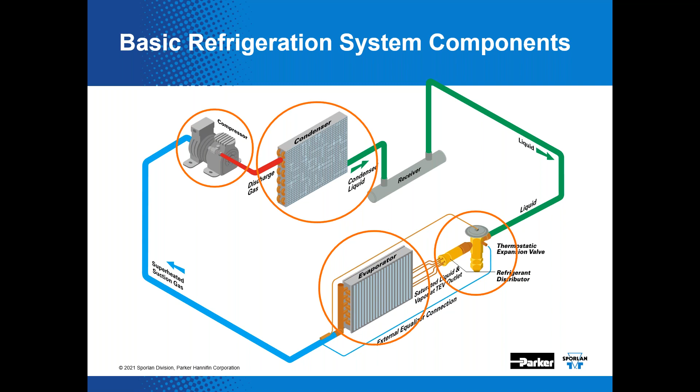That modern refrigeration system can be pretty advanced and seem very complicated. Jason, have you seen this rack before? That looks like the rack that's out in our lab.

Some installations have multiple distributed racks throughout the store if it's a supermarket. Other designs include one or more compressor racks in a mechanical room with split suctions intended to satisfy both low and medium temp refrigerated cases. These systems may include different refrigerants, condenser types, unloaders on compressors, subcoolers, heat reclaim, head pressure control. And here you can see a bank of compressors, control panels, an oil separator, an oil reservoir, oil filter, oil level controls, and even examples of our Y1236 differential valve.

Gotta kind of squint to see those. You kind of do, but they're there.

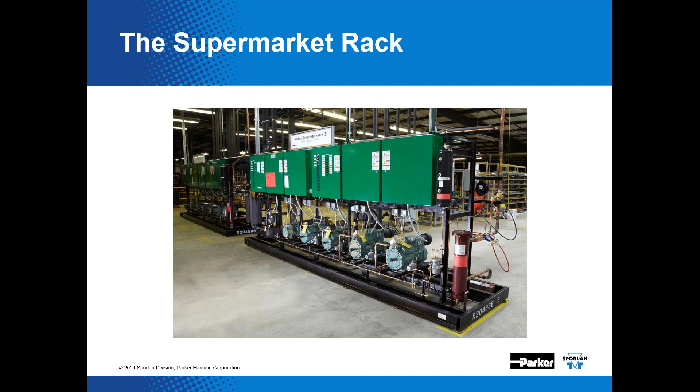They are. And here is that type of system in a schematic form. Again, it can seem quite overwhelming, but if you remember, you've got four main components, no matter how complicated the system. And if you look at it from that standpoint, it's not that complicated. And today we're going to talk about this part of the system on the high side.

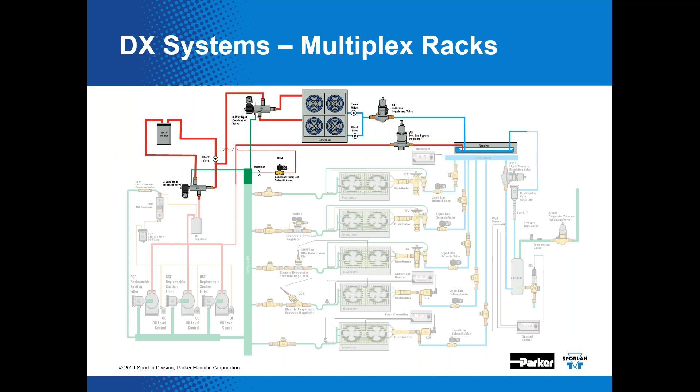There's three factors that really affect the capacity of a condenser. We've got an air-cooled condenser depicted right here. And they are...

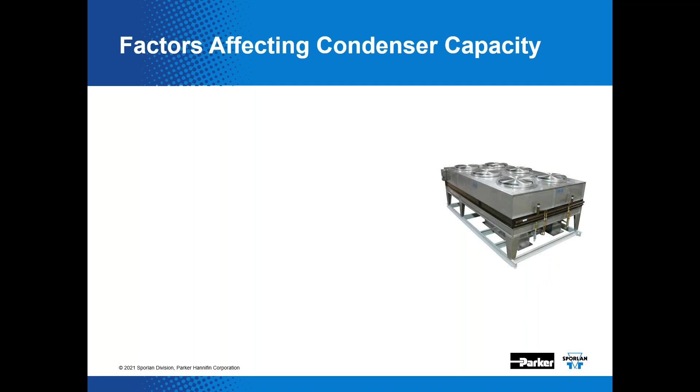Tell us about temperature difference there, if you can untie your tongue.

Yeah, Jason, I know, sorry about that. The difference, TD, is the difference between the air temperature and the refrigerant temperature, and the condenser capacity increases with TD. So TD increases as the ambient falls.

And you have to forgive Jason, he's not used to talking to people. No, and he's got to talk to me right now. And I guess I'm not really considered a people.

No. But as that ambient temperature drops, less heat may need to be rejected through the condenser. This will likely cause the high side pressure to fall or drop with it. So further actions are needed to prevent the high side pressure from falling below a design parameter.

Tell us about airflow there, Jason. So VFDs, variable frequency drives, and fan cycle switches are used to decrease the airflow and optimize condenser efficiency. As ambient temperature falls, less heat may need to be rejected through the condenser. In the old days, that might have been a two-speed motor, but with the advent of inverter drives or variable frequency drives, that's made it even more sophisticated.

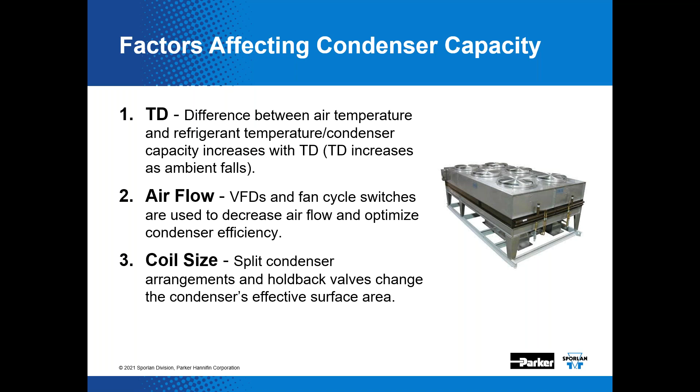And then coil size comes into play, and we can do fancy things like split condensers and add holdback valves to help control the pressure. Typical design sequences will cycle fans to modulate the air side, modulate fan speed. Like I said, we can split condensers, or perhaps even include a combination of all of these options in order to maintain condenser pressure, because that's important.

And as we go through this, we're going to tell you why that's so very important. Keep in mind, at low ambient temperatures, fan control alone may not adequately control condenser or head pressure. Refrigerant side controls by way of holdback or bypass valves generally become necessary at lower ambient temperatures, in the range of, as you can see here in the fine print, somewhere in the 50 to 55 Fahrenheit range, is where that comes into play.

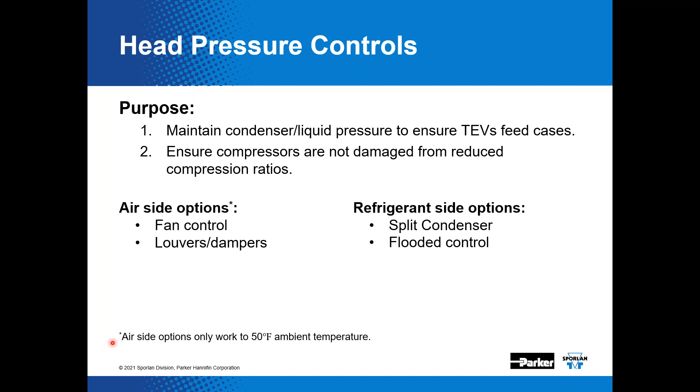Now, there are typically a variety of controls on the high side of the system. We have different presentations where we address the use of a heat reclaim valve to make use of that rejected heat so it's not just going to waste. And there are techniques where you split the condensers, as you can see being done here, so that you can minimize the surface area of the heat transfer surface at times where you don't need all of it. And then there are head pressure controls, which we're going to focus mostly on during the course of this presentation.

System condensing pressure, or head pressure, is directly related to that ambient temperature that we talked about. And as the ambient temperature falls, so will the head pressure in the system. At a certain point, head pressure will eventually approach suction pressure. Now, if you reduce the pressure drop that's available across the thermostatic expansion valve, if that's what you're using as a metering device, you can get to a point where it'll no longer feed refrigerant.

About 50 PSI or so. A differential of that, is that where that happens?

If you get to that point, the case temperature will likely increase, and that's not good for the product you're intending to cool or freeze. Scroll compressors need a minimum pressure differential to maintain engagement of the scroll sets, and low differential pressures across reciprocating compressors can damage reed valves due to low flow rates and density issues.

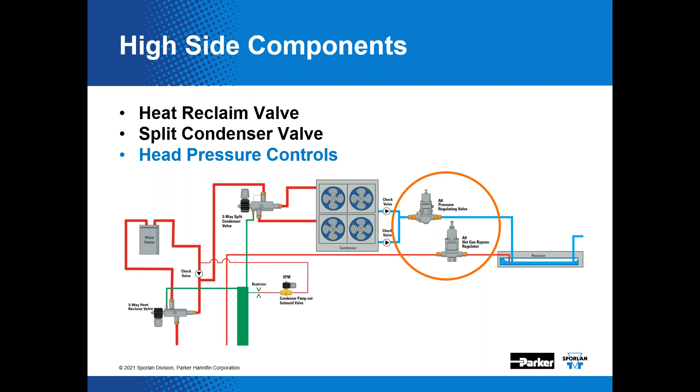Remember, as the ambient temperature falls, so will the head pressure. To maintain the flow of refrigerant and protect the compressor, the condenser and liquid pressure must remain near those original design conditions.

Here's something we wanted to show you, a split condenser technique. This is an example showing a split condenser and some of the required controls. Typically you'd see a split condenser valve here, which is a fancy solenoid valve, and we've got a complete presentation that discusses that practice.

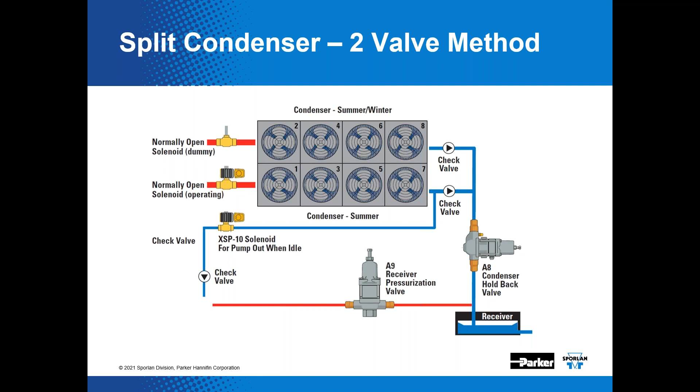We oftentimes get questions: there's two solenoid valves here, only one of them has a coil and the other doesn't—why are you doing that? And that's why that's getting done. So because of this rather interesting technique, we thought it was worthwhile to show.

Now we're going to get back to head pressure control. Here's a simple schematic, one example of a two-valve version of head pressure control. The neat thing about it, as you'll see, is it's an adjustable combination. You see one valve here and another valve here, which almost looks like a copper or brass fitting, but is actually a valve.

You'd use a combination like this on something like a walk-in cooler or a remote condensing unit. The ORI, or open on rise of inlet, is in this drop leg, and it responds to pressure at the outlet of the condenser—it opens on a rise of inlet conditions. This other valve opens on a rise of differential.

It backs up refrigerant into the condenser while increasing the condenser pressure—that's what this valve is doing. And the ORD helps keep the receiver over here pressurized.

We're going to do that, yes. So something that's worth noting, you're going to point it out. Go ahead, tell me. That the ORI valve is not compatible with 410A or CO2, and the ORD valve will work for 410A if you're using a CDS valve or an electronic valve for the condenser holdback valve. And you're jumping ahead. I am jumping ahead. I'm sorry, but we got a whole bunch of stuff we're going to talk about in between now and then. Okay, but we're going to get to it.

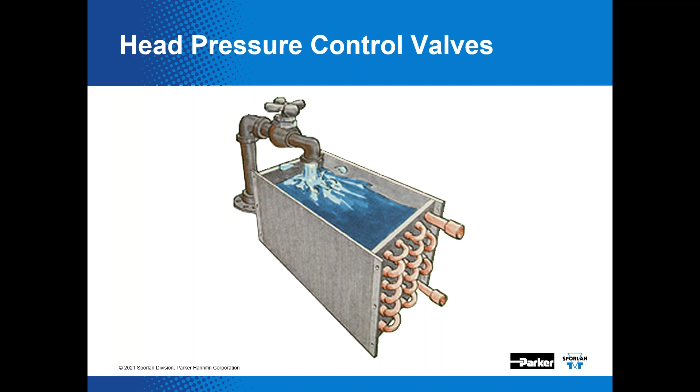We'll get there. Here's a little more detail on what's going on—we're maintaining condenser pressure by flooding the condenser during low ambient operation. This valve helps that to happen.

We've got a nice cutaway here of this ORI-T version. It has an adjustment mechanism that is located directly opposite the valve feature that is being influenced, in this case the inlet. It opens on a rise of inlet pressure, so it backs refrigerant up into the condenser.

It has a bellows in here, which you can see, a flexible seal, and it's that flexible seal that has a problem with leaking if overpressurized, like in the case of CO2 or 410A—it'll pop right out, so it's susceptible to failure. There's also a low temperature solder joint in the valve, meaning don't overheat it when you're installing this valve.

That's why we've got extended sweat fittings built into it, to help keep you from doing that. If there is a leaking bellows, it can in fact impact the valve setting, and it might go unnoticed for years.

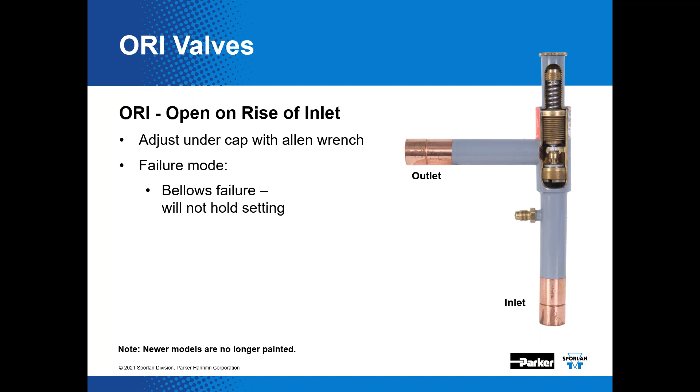Now here is the open on rise differential. This ORD is included as part of the OROA, which we'll talk about in just a minute. But I thought I'd share how this particular valve functions as the pressure across it changes. If there's literally no pressure differential across this assembly, that valve remains closed.

It's closed. If we get up to the point where we've got a 6 PSI differential across it, there's a friction sleeve in here that helps keep it from chattering, and it's going to still be effectively closed.

As you approach 14 PSID, it's going to start opening up—it'll be cracked open a little bit. Then at 20 PSI, it's going to be full open.

It's our rated position. Have you taken that into account in your selection program? How does that do that? So virtual engineer will take into account the stroke of the ORD based on the system pressure and rate it accordingly. That's pretty neat. This shows that we've got different versions available depending upon the natural pressure drop you're going to see in the system, and we've got different spring strengths in these different products.

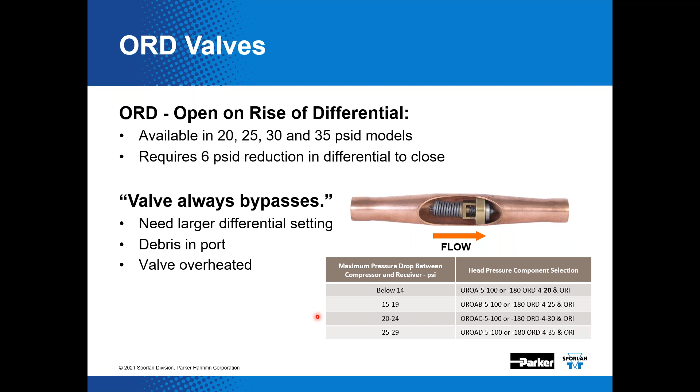Now here is an example of a single valve head pressure control mechanism. It's the OROA. It combines the function of the ORI and the ORD. Again, you would use this when only one valve was desired to be utilized in the system. Keep in mind, originally this was sold as two valves.

It'll make more sense when I pull up the next diagram. It responds primarily to outlet or receiver pressure, so it opens on a rise of outlet. There are three connections you have to make in the system to install this valve, and it is non-adjustable, meaning we build this valve to a particular setting. Standard charged-to-a-setting pressures would be anywhere from 100 to 180 to 210 PSIG. We've done custom settings for OEMs when they've requested it in the past. And again, not suitable for 410A or CO2.

Now here's a nice cutaway of that product. Here you can see, if you look closely, this is the ORD. At one time, when you bought this valve, you bought an ORO and an ORD, and you had to braze them together out in the field. This was our first, or one of our first, value-added assemblies that we offered to our customer base. These three connections are tied to the discharge, the condenser, and then the receiver.

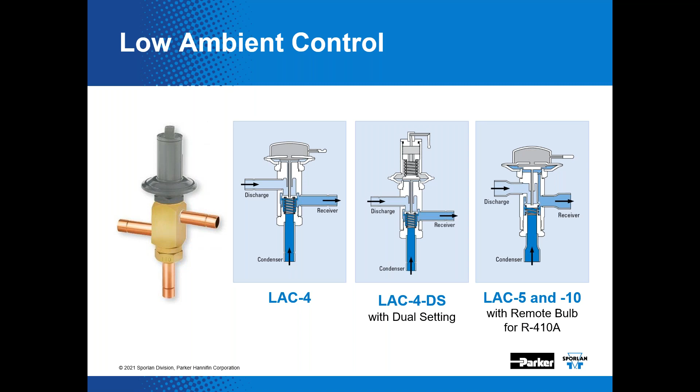Here's some more troubleshooting tips. So if the valve is constantly bypassing discharge gas, that could be because the natural pressure drop exceeds the OROA's capability - if there's more pressure drop between the compressor and the receiver than there is across the discharge connection, you may need a different size or a different setting for an OROA. That's what that maximum pressure drop column is talking about. Also, if there's debris in the system, it can get clogged in the port and the valve can't close correctly, so it won't be able to shut off that discharge connection because there's some crud there. And then if the valve's overheated, all sorts of strange things can happen, so we really recommend that you keep the valve cool while you're brazing it in.

This shows that depending on the pressure drop between the compressor and the receiver, we've got valves with different spring ratings built into them, both for the OROA and the ORD.

Another question I get a lot on the phones is somebody will say, hey, I have a contractor who came in here with an OROA-B. Can I just give them an OROA? Well, no, because then you're going to be bypassing the wrong spot. That's a good point.

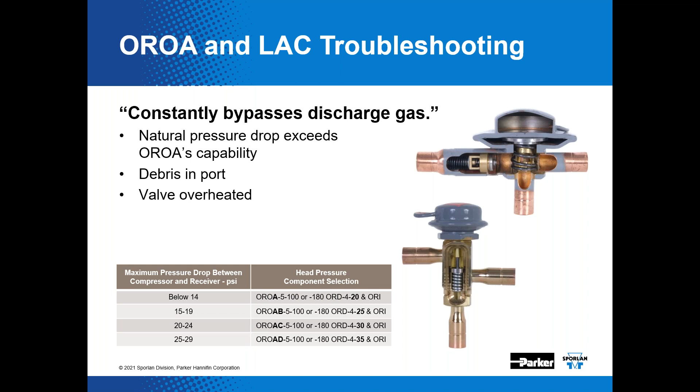There is some degree of simplicity with respect to the nomenclature for these products. We've discussed this briefly already, but in the case of the ORI, its acronym infers what it does - it opens on a rise of inlet. The next placeholder in the nomenclature is port size in eighths of an inch; we make two sizes of this particular valve, a 6 and a 10. Then this is the nominal adjustment range, 65 to 225 PSIG, and then connections in the next placeholder. The versions we sell through the aftermarket are most often equipped with an optional inlet strainer, and depending upon the application, we've got the high pressure bellows built into it.

Correct. The ORD's name infers what it does as well - it opens on a rise of differential pressure. Now in this particular case, we only make one size, which I'm going to elaborate on shortly, but that's always perplexed me somewhat. And then this is the opening pressure differential, but we've stepped through the sequence of what it takes to get it to full rating. You can find lots of details about these products in our bulletin 90-30, which is free for you to download from sporlan.com.

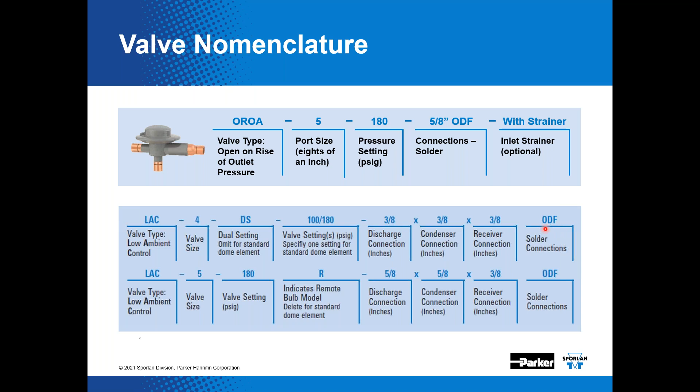We do have a dual setting version, and this one has a range associated with it if you incorporate that dual setting option. And then fitting combination, because we've got 3 connections to make, and then different styles of fittings, like this is the outside diameter female.

Here's yet another 2-valve answer to the question of how to control head pressure. Generally, if the desire is to have the ability to adjust these valves, the 2-valve approach is going to be our best answer to that. If you want to simplify the number of connections or the number of products you're using to control head pressure, then you can do it with a single valve, either in the OROA or the LAC product lines. This depicts the refrigerating specialties answer to this.

Refrigerating specialties is part of Sporlan and Parker, and they manufacture these industrial style valves. They're generally going to answer the capacity requirements of larger systems. Here you see the Flowcon A8 and A9 valves. They serve the same basic purpose as the ORI and ORD valves, but with higher available capacity ratings for those industrial applications. They maintain condenser and receiver pressure during cold weather operation. Like I said, they're adjustable, they are serviceable.

The A8 is the holdback valve that you see here. The A9 helps to pressurize the receiver. We may not have really elaborated on this adequately enough, but as you hold refrigerant back into the condenser surface, if you do not bypass this condenser and pressurize the receiver, you'll eventually starve the metering device. And so that's the function of the A9 or the ORD, is to help keep that receiver pressurized. Artificially raise the head pressure. Yep.

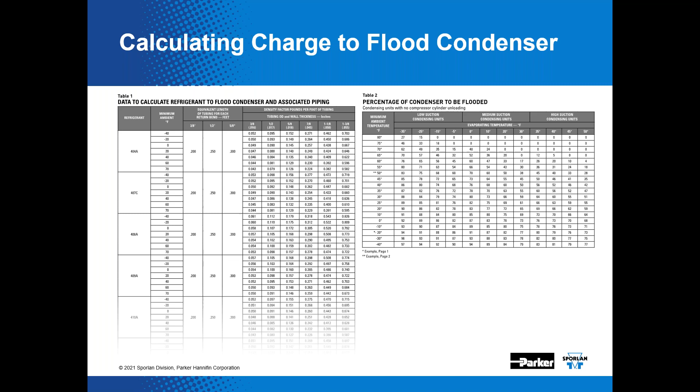Now, that additional refrigerant that must be added to the system is something of a drawback when you consider flooded head pressure control. This is an added cost to the supermarket or to the building owner, and the added refrigerant is at risk of being lost through any external system leaks.

So combining more than one method of head pressure control, while it's common, you need to take into account that you need to have a good, clean, dry, and tight system. As Don would say, clean, dry, and tight. So if you know any leaks exist, you really need to go fix those leaks.

And then at that point, it's time to replace the filter dryer and then add the charge till you have a clear sight glass or see-all, unless you know something different as far as what the manufacturer has recommended.

And depending upon the ambient temperature, the valve side head pressure control, the ORD, as we're depicting here in this case, may be engaged and start stacking liquid up in the condenser.

Again, you'd use Bulletin 90-30-1 to determine the amount of additional refrigerant charge needed for the system to operate at current ambient temps, and also determine the additional refrigerant for the coldest ambient temperature, unless the manufacturer has already done that for you. Make sure that receiver is large enough to hold the extra refrigerant.

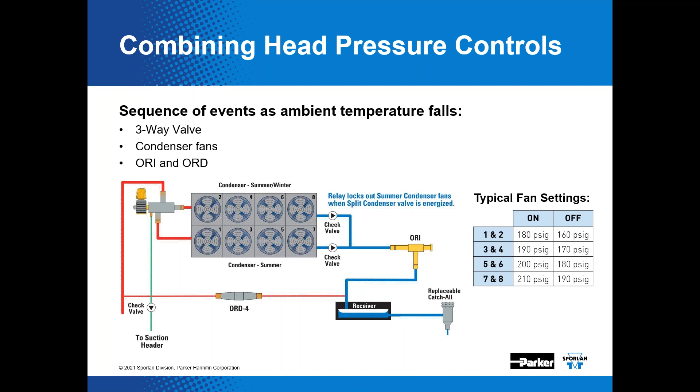Now here's a neat little trick that not everybody knows about. Like we've said, we only ever made one size of ORD, and we've shown the ORD4 here. And likewise, we only made one size of the OROA, the OROA5. Again, that 4 is a relative term that indicates the diameter of the port in the ORD. Not saying that it can't be fitted with different springs to yield different settings, but for flow, we only have one size, and that can be a limiting factor.

Jason, what do you think that was indicating to us, that maybe we should have had a bigger size? Yeah, maybe so. Never did it though.

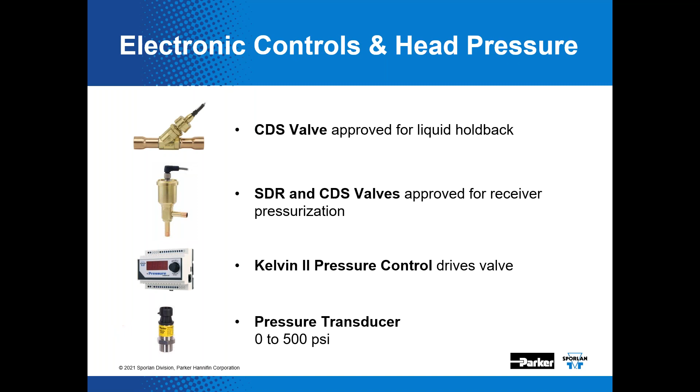We can also support the conversion of certain mechanical valves, and we've got step motor actuators in kits that can be used to convert these products if you're doing a store remodel and that's important to you. We've seen energy savings realized in the 2% range with new store payback, less than half a year.

For retrofit options, we've got CDS kits available, for instance in this application with the A8, with decent paybacks in that 1 year range.

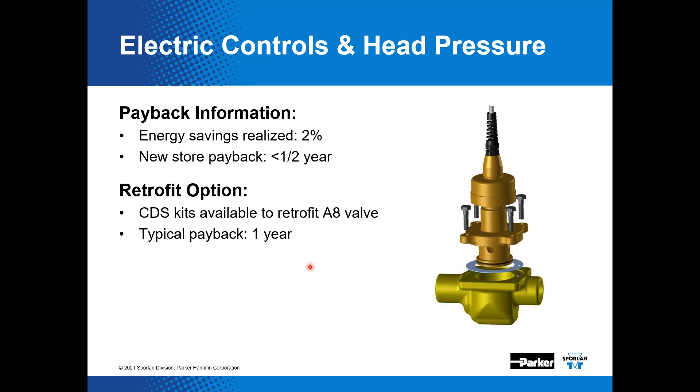I don't know where the time went. It seemed like this went by fairly quickly and we're getting close to being finished. Don, if you're still out there, are we getting any questions? We do have a handful of questions here, we could start dealing with those now.

Shane's asking, you keep saying that less heat needs to be rejected at low ambient. Shouldn't it be easier to reject that heat since it's low ambient? Oh, it is. It makes that condenser ever more efficient, and that's what helps bring that pressure down.

What else you got there? I got another one here from Frank. It says if debris gets in the valve, does it need to be replaced? Well, maybe, it depends on the valve.

Some of these valves, for instance the ORI 6 and 10, have a fairly big port. You may be able to cycle the valve and break that debris loose, maybe. With an ORI 6 or 10, we'd recommend you turn that adjustment stem all the way out, all the way back in, and see if that helps dislodge the debris. You'll have to watch the system for a little while. Sometimes that can work, not all the time.

With the CDS product line, you might be able to cycle that valve again to dislodge debris, depending on what it is. We have replacement motor kits for the CDS, so you could service that valve. The A8 and A9 refrigerating specialties valves could be rebuilt.

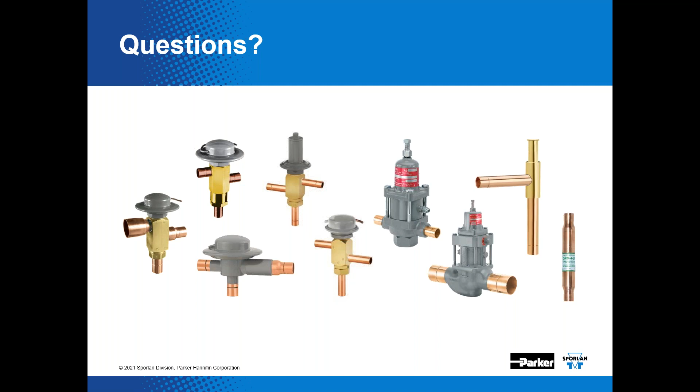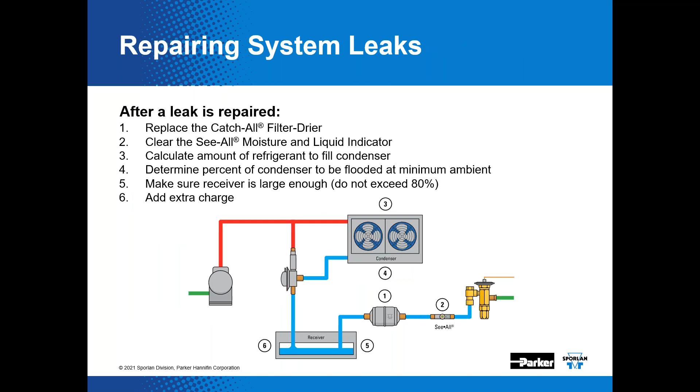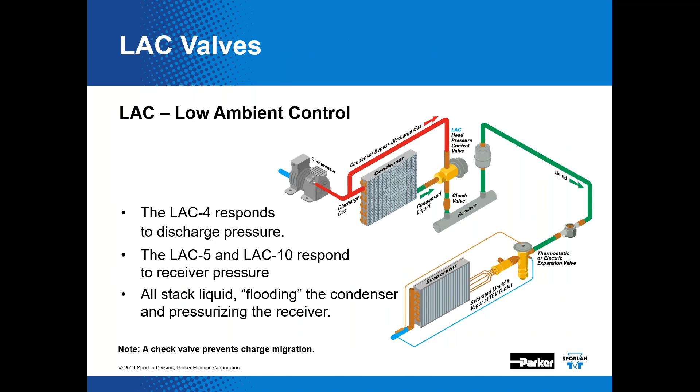Well, you can. You can do anything you want to do. But here's the thing. If I back up a little bit, it might help to elaborate. If you just back refrigerant up into the condenser, I want to find an image of that.

If you just back refrigerant up into this condenser and you provide no means to bypass through this ORD into the receiver, you'll eventually starve this metering device, whether it's a TXV or not. So if you're going to use an ORI, you really need to have this bypass leg built in with some type of differential valve to have a little bit of control, so that it's not freely bypassing all the time. Does that make sense?

It does to me. If you're going to do the two valve control, you have one valve that backs refrigerant up into the condenser to help elevate the pressure. And then you've got a second valve that keeps a steady stream of refrigerant supplied to the receiver so that you don't starve the rest of the system.

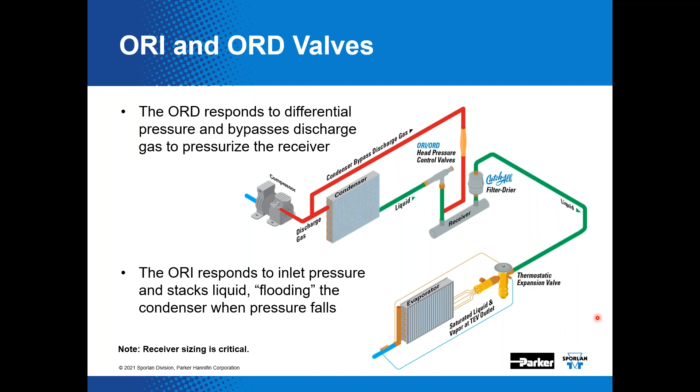Because if you simply back the refrigerant up in the condenser, you will elevate the pressure there, but it will be at the disadvantage of the system continuing to function. Yeah, it'll eventually close off the condenser and you got no refrigerant.

You got more questions? I have several more. Let's see, we got Glenn saying, you mentioned fan cycling controls. Can you explain why valves might be a more reliable method of controlling head pressure?

Well, I think it's a double-edged sword approach. Fan cycling and staging fan motors, or using a variable frequency drive, is a perfectly fine way to control head pressure, provided you're in the range where it functions well. And that is usually 50 degree ambient and above.

I know there's places in South Florida and South Texas where they might have valve side head pressure control on their systems, but it doesn't come into play. It's when you get below those ambient conditions that the combination of the air side in conjunction with the valve side does a really fine job. I guess that's how I'd look at it. I don't know that you necessarily do one to the exclusion of the other, though there are systems that do.

Yeah, and it's region specific, really. The more north you get, the more the valve side becomes an important component in the system, and it functions well in those colder climates. If you're using things like dampers and motorized vanes, they might ice up, and that becomes a problem, or the fans might ice up. But if you live in a part of the country that never ices up, or never gets below 50 degrees Fahrenheit, then fan side is a reasonable approach.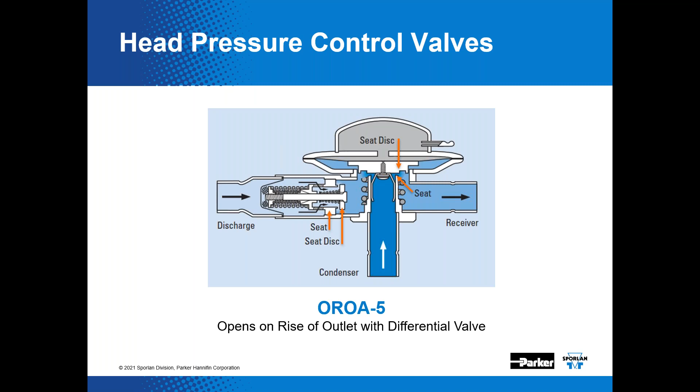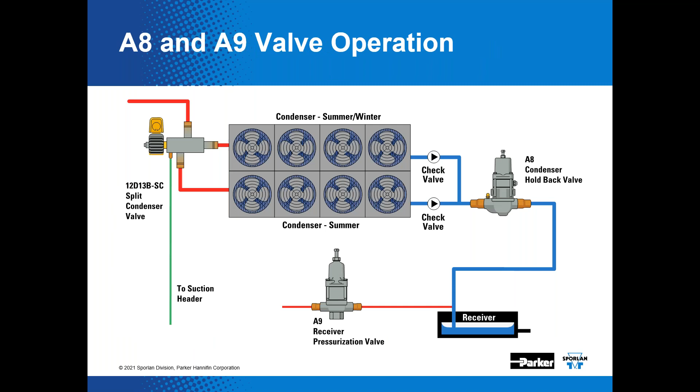We have Lisa asking what are our recommended settings for the A8 and A9 valves. We had some options. It's going to kind of depend on the refrigerant in the system and the application, but we've got some suggestions here. Let's see, we've got 180 and 160 as a particular example. That's not hard and fast, it just depends on what refrigerant is in the system. Depending upon the refrigerant in the system, this number may need to go up or down. We typically like to see, or try to size a setting for head pressure somewhere between 90 and 100 degrees Fahrenheit. That way you know your high side components are going to be sized correctly.

And again, we are planning a future presentation down the road to deal with the refrigerating specialties product line.

Steve was confirming that we were talking about the mounting orientation of the A8, A9. Did you get an email address for him? We do, and we have a couple other people that want that as well. Okay, can you note those email addresses down? Yes, I will take care of that. Okay, and then we'll confirm that.

I think what it amounts to is, I'm reasonably sure, like we've depicted here, you can mount the valve with it pointing to the sky, and you can mount it in a horizontal position. What I'm not sure is if you can point it to the ground, and that's what I need to confirm.

Okay, all right, so what else you got? We have, what is the recommended— Oh, I'm sorry, copy me on those replies too, if you would, please. Oh, absolutely, that's understood.

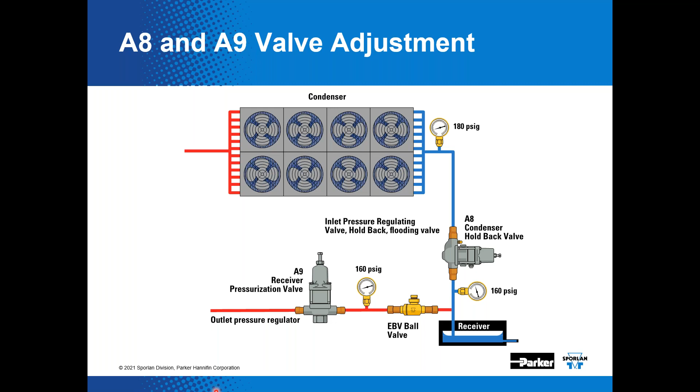But we are adding a lot of things to Virtual Engineer. We keep adding stuff every day and tweaking things, and that one just hasn't made the end of the list of the day, but we do plan on getting that done, hopefully soon.

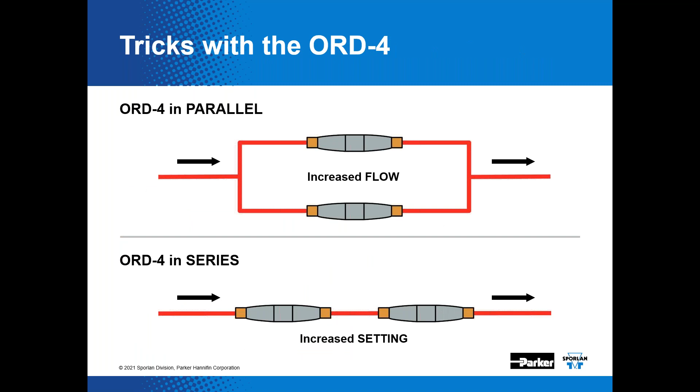More questions? We have more questions. Shane is making a comment here: head pressure valves reduce the need for a larger coil at low ambient temperatures.

Christine is coming back and saying her comment about the compressor discharge valve is, is it even part of the OROA operation? And it shouldn't be. So, but again, if they're doing something goofy there, I don't know what that is.

Well, it'd be kind of hard to say. We don't know the specific ramifications of the suggestion by this OEM. If you have a diagram you could send to, say, Jason's email, he can take a look at the diagram or the specific instance and maybe comment on that.